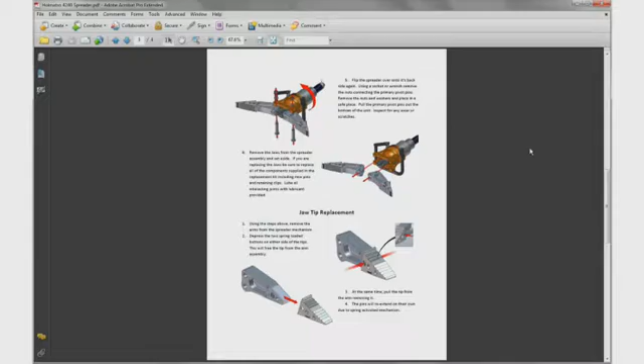This is your first look at SolidWorks Composer. Whether it's a PDF instruction manual, an online interactive parts catalog, or any documentation your organization needs to create, SolidWorks Composer has all the right tools to make your technical communications a reality.

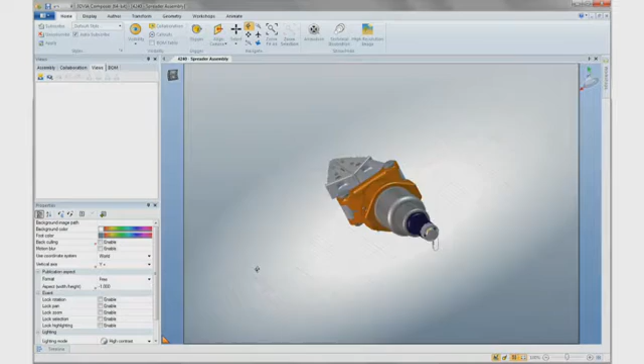Let's start by looking at creating documentation for the Holmatro spreader assembly designed in SolidWorks. SolidWorks Composer can work with your native 3D engineering data. Accessing the models is as easy as File Open. Time is saved because no translation is required and the intelligence of the model is preserved, including the design hierarchy.

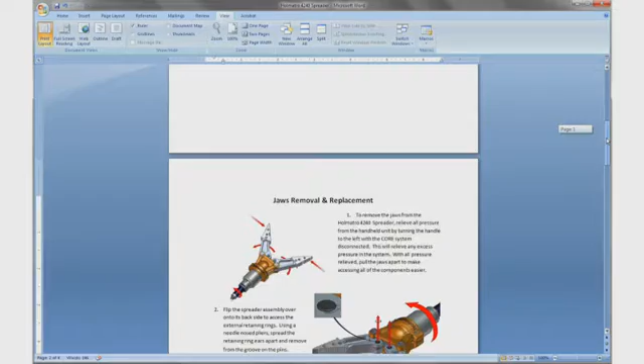We will take a look at an instruction manual already in process. This document is provided with every spreader assembly. We can see that a variety of high-resolution images created in SolidWorks Composer has been implemented within this Microsoft Word document. However, if the design changes, the documentation needs to stay up to date as well.

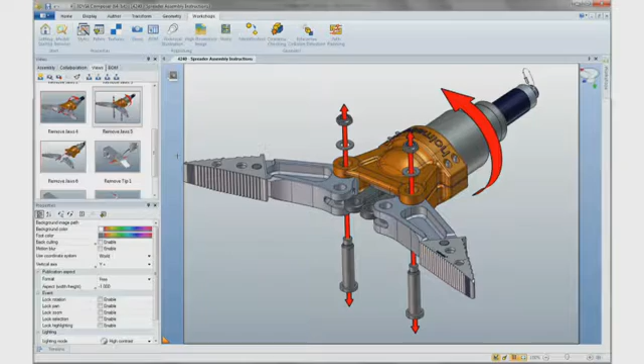The creation of this manual was well underway before the design had been finished. We can see that none of the views contains the handle assembly that was recently added as a design change. Thanks to SolidWorks Composer's associativity, we can see how a change within the engineering software will affect the work in progress. As the design change is made, the documentation can be made current with a simple update command.

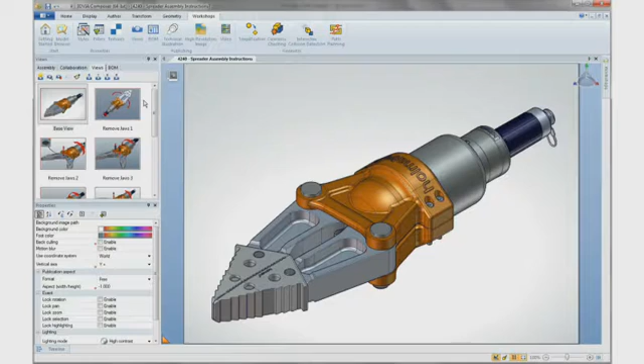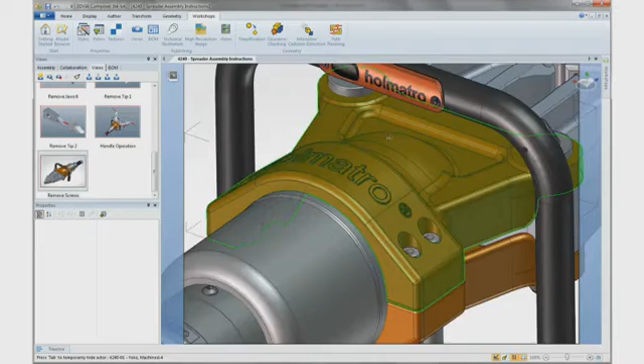SolidWorks Composer will automatically refresh all of the relevant views with the new changes, keeping documentation and engineering always on the same page. Creating the images and views is simple, with an easy-to-navigate ribbon-style user interface similar to other Windows applications. We can freely create new views as desired to describe various operations and procedures.

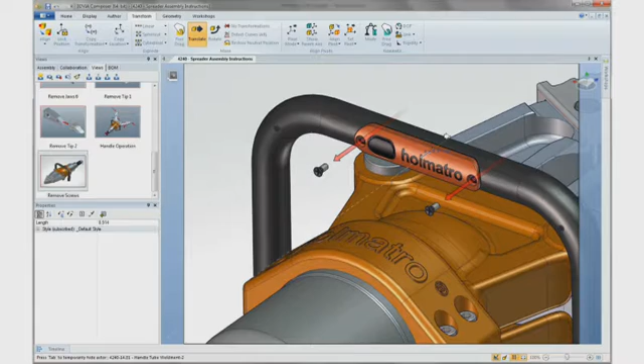It is easy to change the orientation of a view and manipulate the geometry into alternate positions. Here we can describe removing two screws to access the battery chamber. To further explain the operation, you can add graphical elements, such as directional arrows. They are simple to locate and snap to geometry so placement is fast and precise. Further visual customization is possible. Arrow width, length, color, and opacity can be controlled.

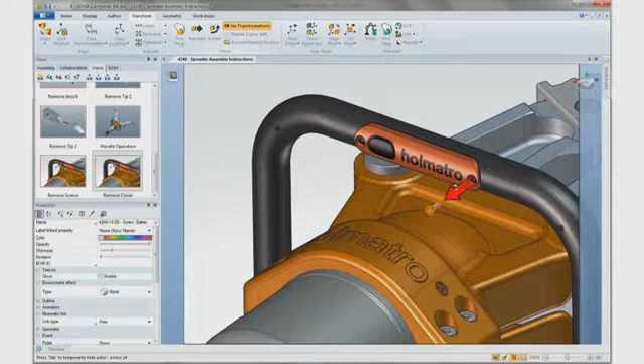Creating additional views is also easy. Here, we can describe removing the actual cover and the battery. To save time, we can use the elements of the previous view to help quickly create this new image. SolidWorks Composer allows us to quickly hide any unneeded components and elements, and then utilize the same tool sets to describe the new operation.

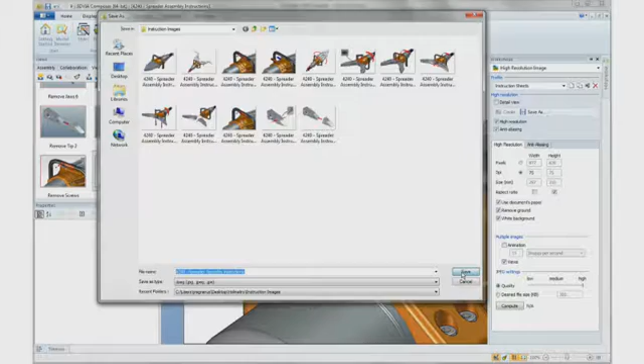Once all of the images are complete, SolidWorks Composer's high-resolution image workshop can be used to quickly export all of the images created in this project. These include all the views that were updated with the new handle component, as well as our new battery replacement images.

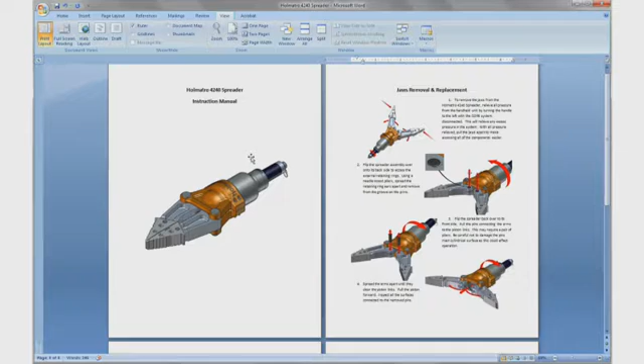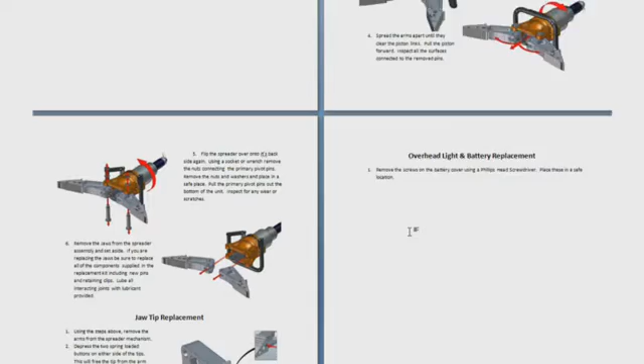Whatever tool you use for publication, it most likely has capabilities to keep all its assets up to date. In the case of Microsoft Word, you simply need to update all of the external links inside of the document to reflect the most recent engineering changes. We now can add the new image describing the removal of the battery cover and battery. Again, it's an easy process.

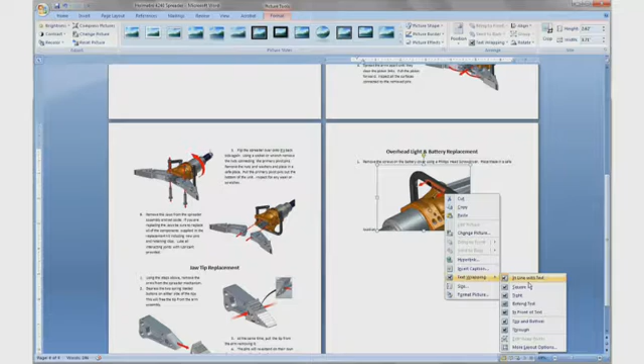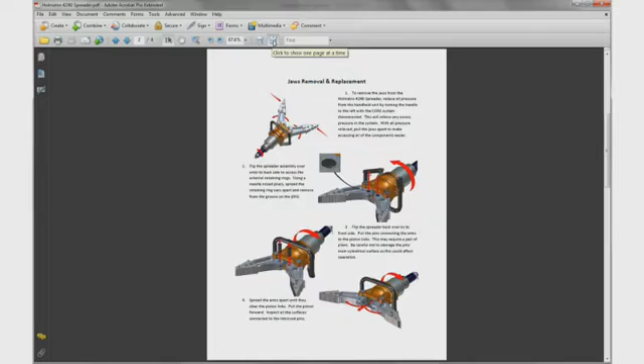Finally, we can save the entire manual as a PDF file, a nice traditional format that is common for user manuals, catalogs, and instructional booklets. It should be noted, however, that with SolidWorks Composer, we can take technical communications beyond traditional formats and create compelling interactive experiences. In the case of an online part manual, we utilized SolidWorks Composer's intelligence to include an interactive bill of materials. We can hyperlink components and create dynamic panels.

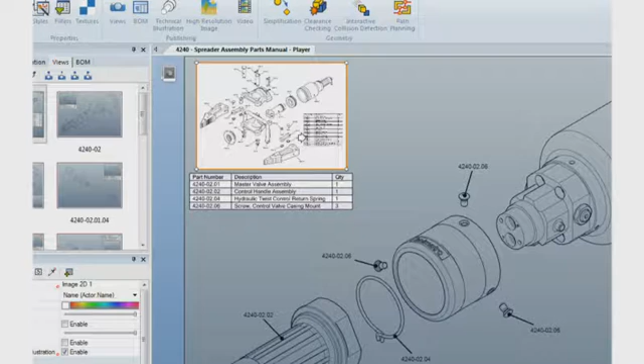For example, to return a user to the top-level assembly view, we can utilize a small image as a virtual back button. Navigation is aided by rich graphical content. SolidWorks Composer can save all images in a scalable vector format, so they will preserve their clarity at any size in which they are used.

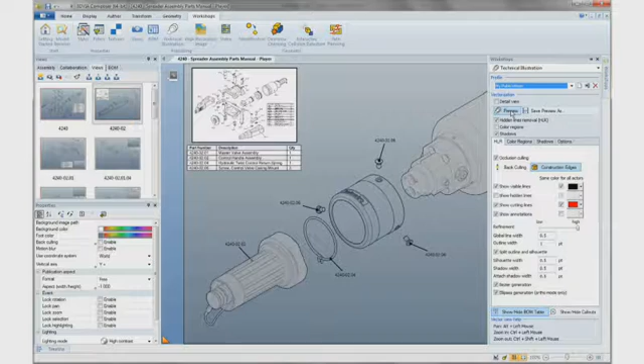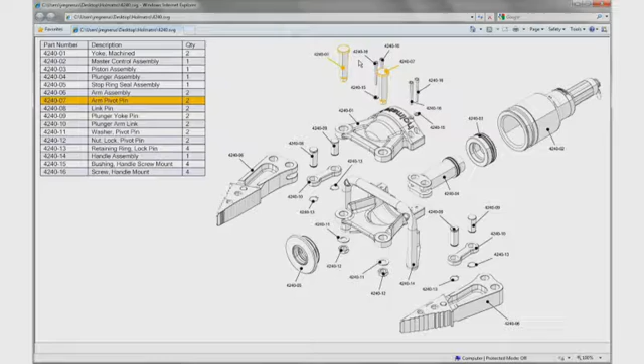Therefore, the online parts catalog can be created simultaneously with the instruction manual, and most importantly, can be created in parallel with the product development process. Any changes to the design can be automatically propagated throughout all of these compelling deliverables. If you're creating paper documentation, online experiences, or simply wish to further your organization's technical communication capabilities, SolidWorks Composer is the perfect solution. This has been your first look at SolidWorks Composer.